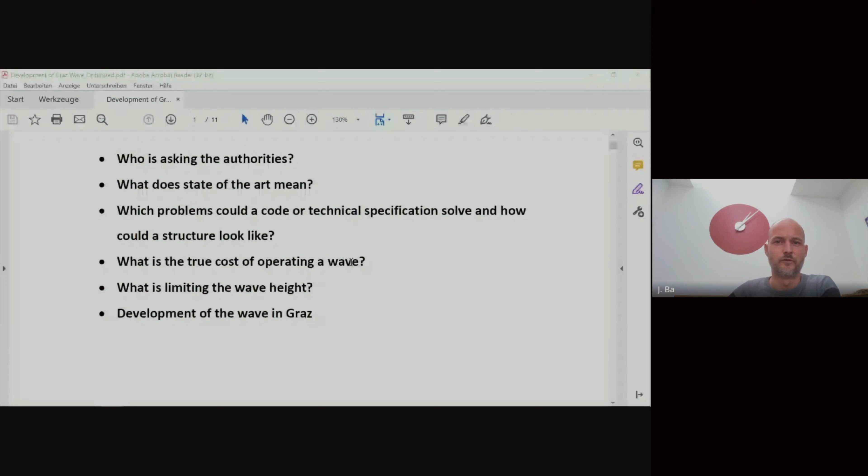This is Josef Bauer. He probably constructed the first wave in Europe, in Čunovo, Bratislava, in 2013. He's the head of the wave projects in Vienna and in Graz, Austria. The talks I had with Josef on the phone were the most inspiring wave-related talks I've had in a while.

So I'd like to share his thoughts on waves and the actual projects. Welcome, Josef. Welcome, we're here. Yeah, so. When preparing what I will talk to you about, I asked myself questions which arose while we were working on our projects.

The project I've been working on in Vienna, and also in St. Pölten there was one project involved, and in Graz as well. These three projects are in different states. Vienna is basically finished, but politics are not convinced, and there's too much trouble with authorities. St. Pölten is also on hold. Graz is pretty far already, this one is about to be finished.

So the first question we are asking ourselves in Austria, and probably some of you have already answered this for yourself, is: who is asking the authority? Is it a person? Is it a club? Whoever it is. What does the state of the art mean in terms of water law?

Which problems could a code or a technical specification solve, and how could the structure look like? This was something I was talking to Paul about on the phone, and I made up my mind, since authorities tend to decide based on written codes or technical specifications. So any wave is, for a typical authority, a new thing. They don't know how to handle it, and they need some kind of guidance for it.

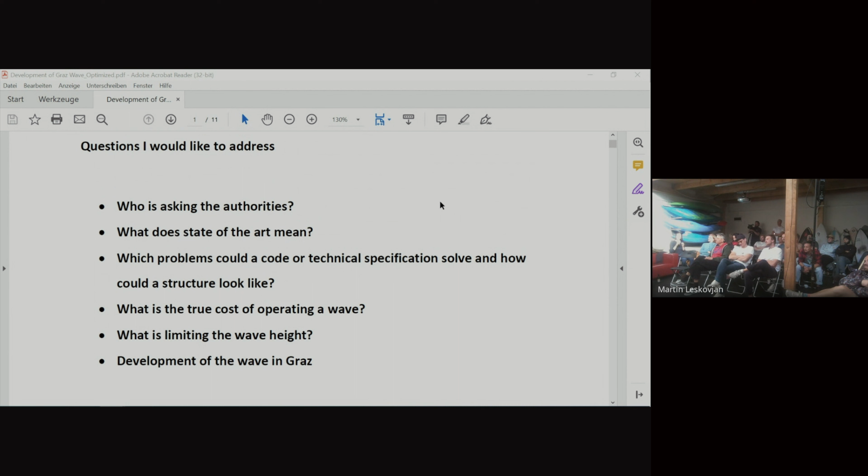What is the true cost of operating a wave is something that is currently a big point in Graz, since we are competing with the water from a hydropower plant. So I'll give you some thoughts on that.

What is limiting the wave height? This is also some hydraulic thing that is keeping me busy. And the development of the wave in Graz in the past year, I want to give you a quick review of what happened.

Where you can see how you can really fuck up a whole year of designing. But at the end, everything you do makes you better. So there is no such thing as failure, in my opinion.

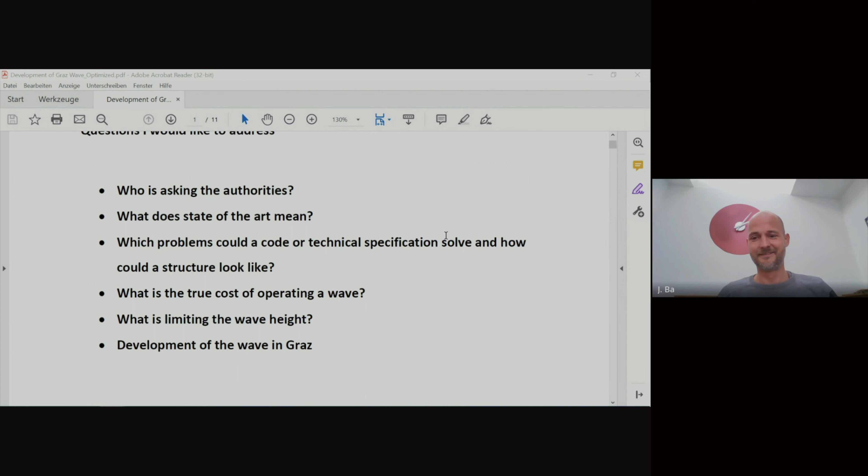I failed a lot. Čunovo was not a real failure, but it was also not a huge success. It's still working. And since then I've failed more than I've actually succeeded, and I think that's part of the game. In surfing as well, I failed constantly, so I'm kind of used to that.

Starting off with the first question: who's asking the authorities? Is it a club? Is it a corporation? Is it a partnership, or is it a cooperative? What could be the differences in liability and credibility in front of the authorities?

If you're a private person asking the authorities, you have the least chance of getting approval—I wouldn't say the least chance, but you're not very credible. If you're a club, I'd say you're also not very credible, since clubs are very vulnerable to changes. If you're a corporation or a partnership, it's what we call a Personengesellschaft in German-speaking countries—companies where the owner is completely liable with all his private possessions.

So compared to a corporation... can you understand me properly? Yeah, all right. I thought I heard a question or something. No, so...

A corporation is like a Kapitalgesellschaft, some form of organization that is only based on money, basically. Once it's bankrupt, the money is gone. Well, people can also be held accountable for it, but normally not.

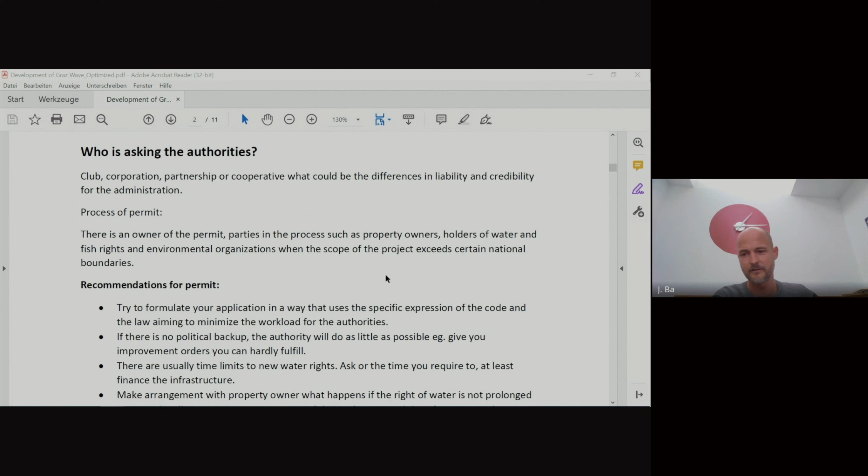So keep that in mind. Think about who is asking for permission. The owner of the permission is holder of the right to build, and this is something valuable. You can get financing for it, because a bank will probably give you a credit or money just based on the permission of building. So this is a very important point you have to take into consideration.

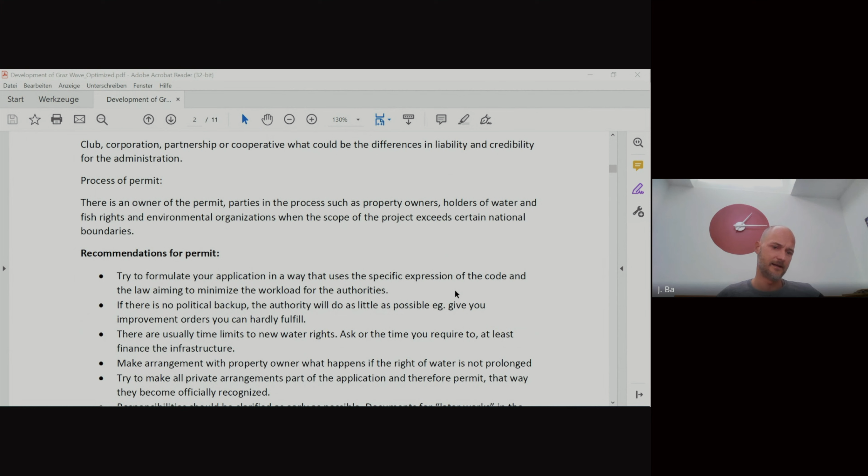And if you're a club, might as well — this is the foundation for a vital club financing, if you have the permit for building.

My recommendation, from my experience as part of authorities, is to try to formulate the application in a way that uses the specific expressions of the code or the law, aiming to minimize the work for the authorities. The authorities are pretty busy, or they are lazy — there are two things. The more you formulate your application so that they can just copy and paste it, the higher your chances that there are no questions asked. It really makes a difference if you address all the relevant points that are in the law, basically the state of the art, which I'll come onto later.

If you do not have political backup, which is quite often the case, the authorities will do as little as possible to help you, and maybe they give you improvement orders. As we did in Vienna, we got an improvement order asking us to present private contracts with all the stakeholders in advance.

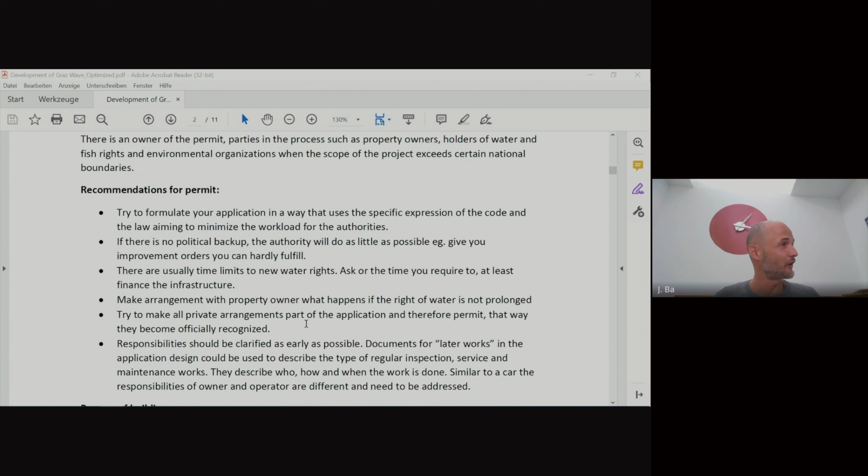So that was actually a fucking asshole move from the authorities. They made us — I wanted to negotiate this in a local hearing, but the authorities said no local hearing, you have to present these private contracts prior to before we do anything. And imagine, as a club, making a private contract with a university, with the city of Vienna — they just give you the finger if you don't have the political backup, if they don't want it.

In our case, we had the wrong political party behind us. The left wing was against it, and the conservatives were for the project. So we had conservatives and right wings for the project, and the left wing state authority against it — not the state, the city authorities. And the city authorities just said, fuck off, we don't do what the state wants. So that was the point.

So try to get political backup, which you do anyways. I think this is a no-brainer.

There is usually a time limit to water rights. Water rights are not infinite — you get a time limit, 20 years for example, as for any construction permit. Try to take this into consideration and ask for as long a water right as you possibly need to finance the infrastructure you're about to build. As far as I know, 20 years is common, but it may differ from country to country, so I can't tell. You can apply for a longer time if you can argue it.

If you can say we invest so much that we need longer to refinance it, the authorities might give you a longer water permission. You can reapply for this water permission, but you have no right for it again. So after 20 years, they can basically say, thanks for being around, we're not talking to you anymore.

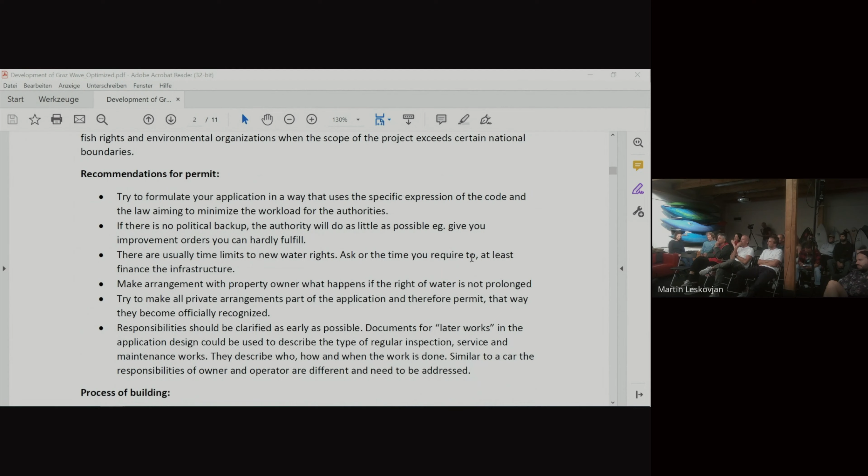But this is a highly legal problem, which I'm not an expert in, but I just want you to consider: make arrangements with the property owner and the owner of rights, like fish rights or water rights, and put this into the application. That way it's part of the permit and it will be valid forever, or as long as the water right is valid.

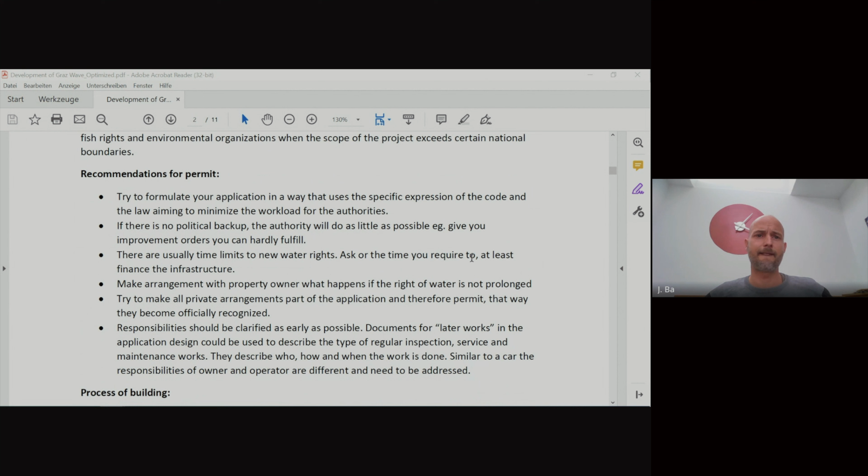That comes in handy because you don't need any lawyers or anything like that. You just make a written agreement, put it into the application, and the authorities will say yes, that's part of the approval now, and it becomes valid.

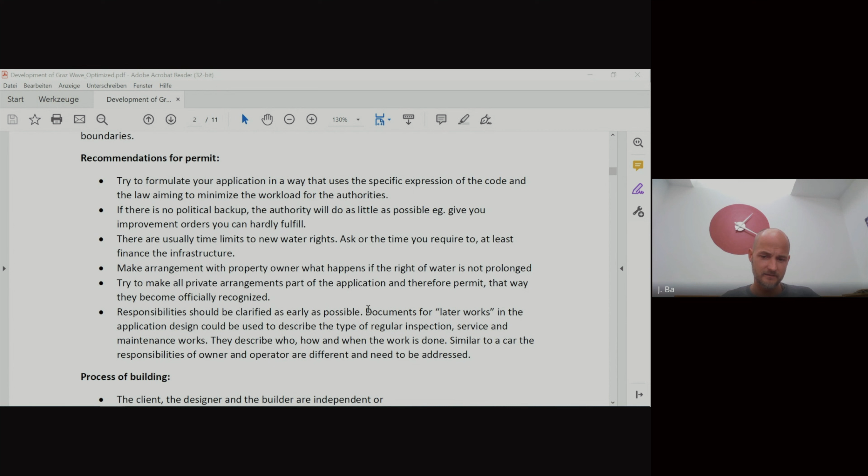Try to make this private arrangement I already talked about, and clarify responsibilities in the permission process as early as possible. We know the documents for later works, that is in Austria for work security. So all the maintenance and inspection works you will have to do, where employees put themselves in more or less danger, these works need to be described and should be part of the application.

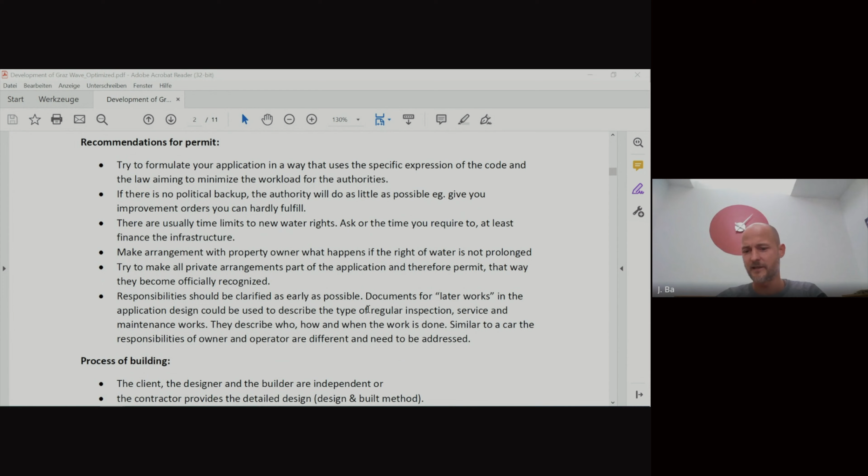I would highly recommend it. They should also clarify who, how, and when this work is done, and who is in charge of it. Similar to the responsibilities of a car owner and a car operator with waves: the owner has responsibilities for any hidden faults.

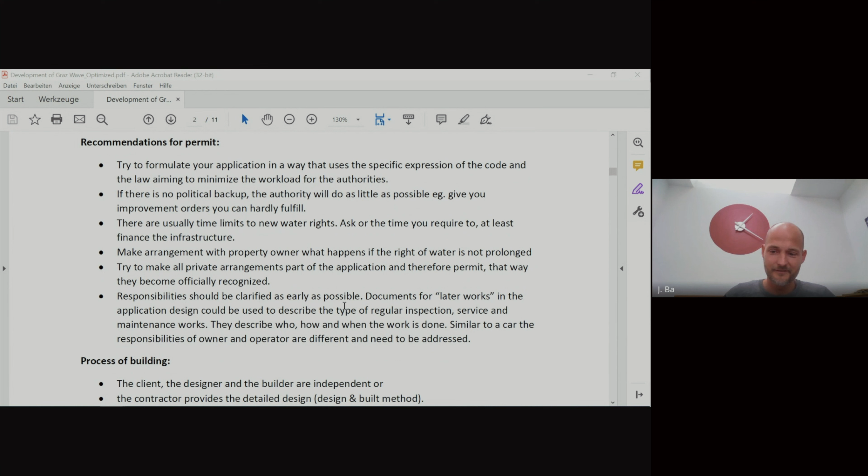And the operator also has responsibility for the obvious, for traffic security as we call it - just check visually if everything is okay, then you're safe to operate. On a car, you need to check if all the lights work; this is just something the operator has to do. I'm sure the guys from Hanover and also from Nuremberg could have talked about it, but this is something very important.

Then the process of building - I think it's pretty clear that there are three parties: the client, the designer, and the builder, the contractor later. They could all be independent. This is the German or Austrian, Central European approach. The Anglo-American and English approach is you only have a contractor who is providing the detailed design as well - he takes on the design-and-build method.

Could be cheaper because construction companies know a lot about how to save money. If you give them all the detailed design prior to building, they are stuck to it. They can always make suggestions, but then they're not taking the risk. Usually there is some kind of value engineering called for in the codes in Austria.

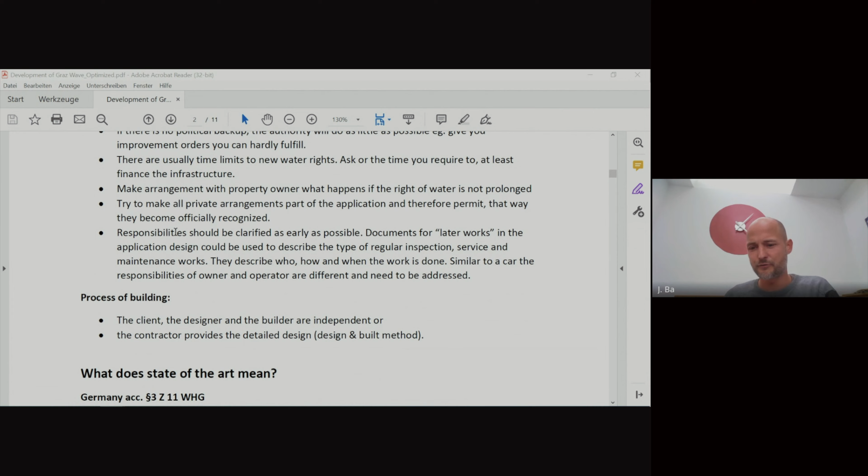I would highly recommend being aware of this. If a contractor finds some savings, the amount you save is split in half between the client and the contractor - basically that's the theory behind it. It's giving the contractor the opportunity to take the risk for efficiency gains in cost-efficient construction ways. He has to take all the risk, but as a reward, he gets half of the benefit.

This is also a way to encourage construction companies to lower prices or be creative during the construction phase. But if everything in the contract is totally described and there is nothing to optimize for them, this is done. If the contract between the contractor and the client says everything in detail down to every screw, there is hardly any room for movement for both of them, as far as my experience goes.

That was the question - these are the things that I came up with in my brief summary. What does state-of-the-art mean in terms of water law?

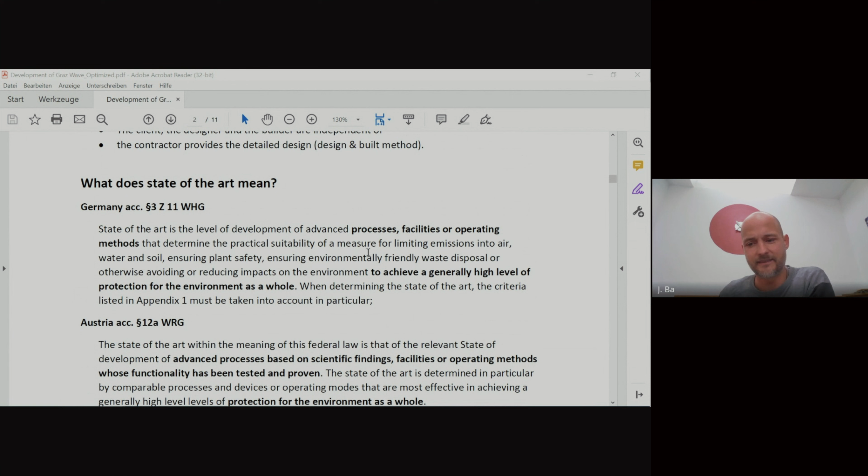We have it in any law, like the railway law in Austria, also in Germany, and I guess in every country. Each law defines the state-of-the-art in the meaning of that law by itself. It's crazy, but that's the truth. They do not differ a lot, but they do differ.

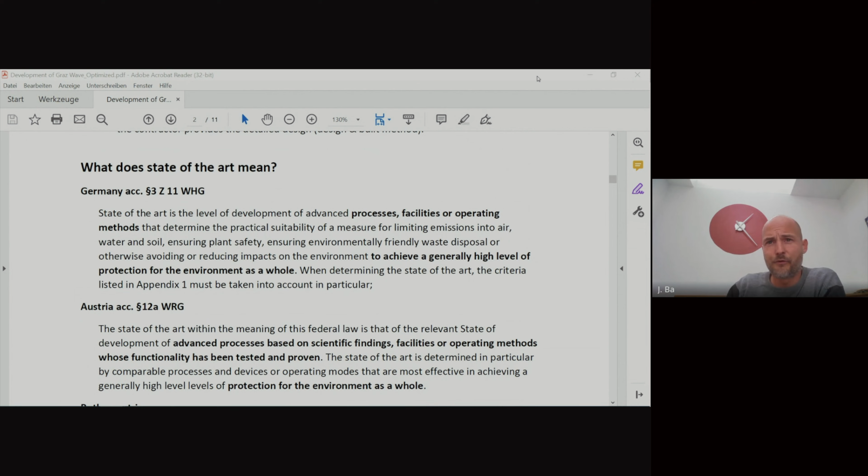For example, I have the two from Austria and Germany. Germany first is the Wasserhaushaltsgesetz, the law that defines the state of the art, the level of development of advanced processes, facilities, or operating methods that determine the practical suitability of a measure for limiting emissions into air, water, soil, ensuring plant safety, ensuring environmentally friendly waste disposal, or otherwise avoiding or reducing impacts on the environment, to achieve a generally high level of protection of the environment as a whole.

You see what the main goal is in the water right is to protect the environment and to limit the emissions. This is something every construction in the river is required to fulfill, this abstract standard or state of the art. As we Austrians try to, we do not invent everything new, so we copy a lot from the Germans, since you are 10 times more than we are, so we do not come up with our own expressions. We have it in a similar way in the water rights law.

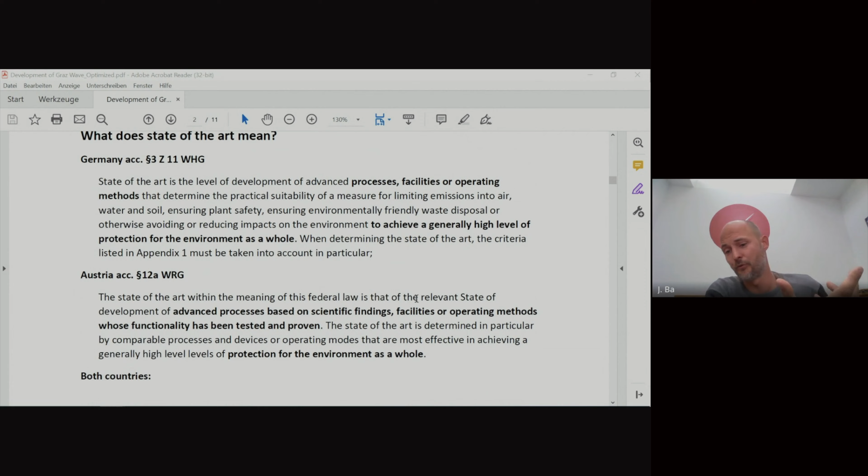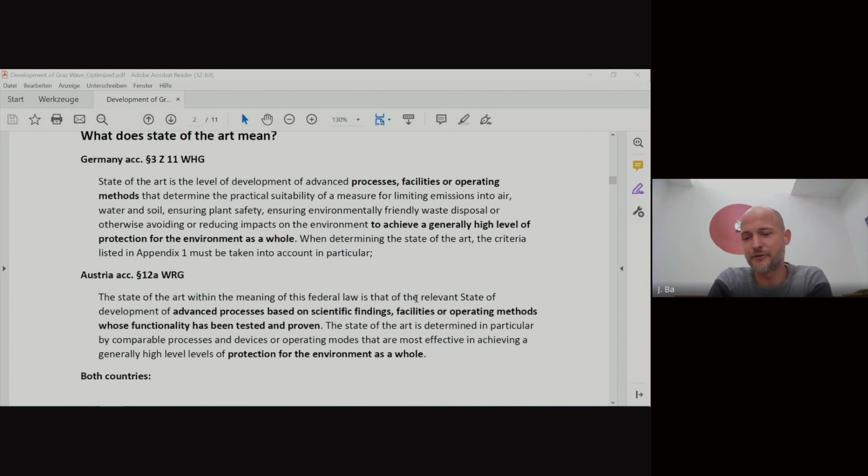Advanced processes based on scientific findings, facilities or operating methods that functionally have been tested and proven. This is something very important for wave building, because all the waves that are existing right now are the state of the art. They are functionally tested and proven, or they are about to prove themselves during operation. And as long as nothing major happens, people don't die there, and there are no legal disputes, as long as that is consensual, these facilities are basically the state of the art in terms of the water law, and we can relate to those.

If you go to the authorities and say, we built something like that there and it works, so I assume it works here as well, they are going to have a hard time to prove you wrong. Or anybody who is against the project will also have a hard time to prove you wrong, in my opinion. So this is a very important point.

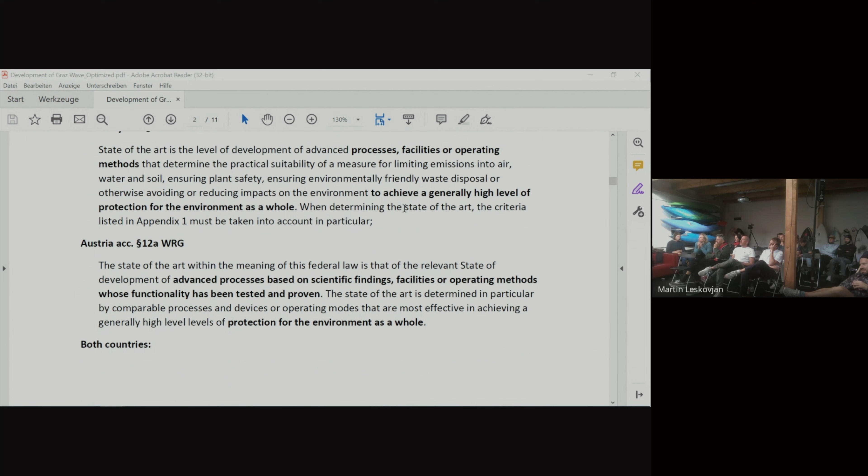This is, in my daily profession, the most discussed point with authorities, because I always say there are no technicians in the lawmaking process. There are only law people there, and they try to come up with this formulation to get a hold of us technicians. This is formulated by law people who try to sum up and confine the technical freedom into some law. And they are always asking me if a design is state of the art, and I'm like, judge for yourself. See this phrase, and then try to tell from this phrase if a construction is state of the art or not. It's very hard to grab.

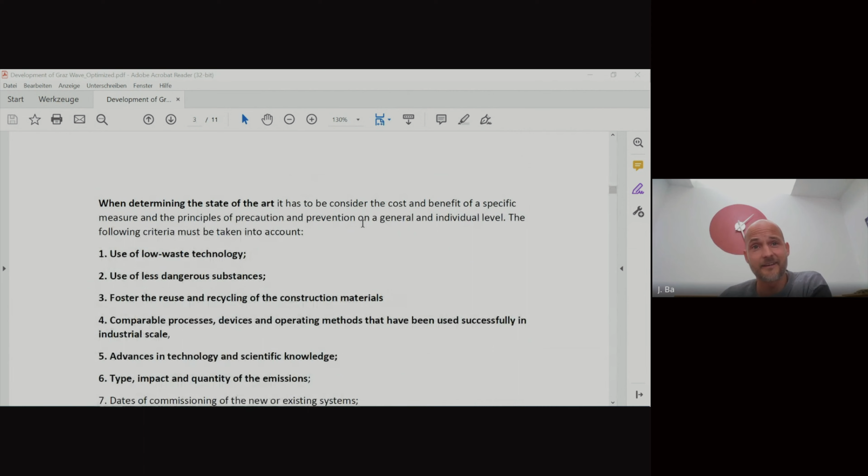Both laws, for both countries, have criteria formulated that are used to describe whether a state of the art is reached or not. That is: use of low waste technology, use of less dangerous substances, foster reuse and recycling of construction materials, comparable processes, devices, operating methods that have been successfully used on industrial scale, advances in technology and scientific knowledge, type, impact and quantity of the emissions.

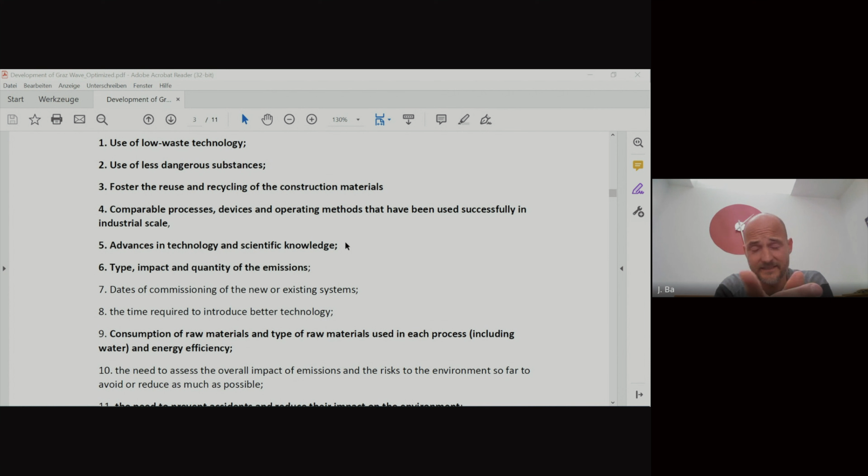The bold ones are the ones I think are also applicable to wave projects: consumption of raw materials and type of raw materials used in each process, including energy efficiency. So this is my translation - maybe it's not exact, well, I used Google Translate, of course, but I corrected it a little bit, so it might not be found exactly that way in the law. The need to prevent accidents and reduce the impact on the environment - it's a very important point.

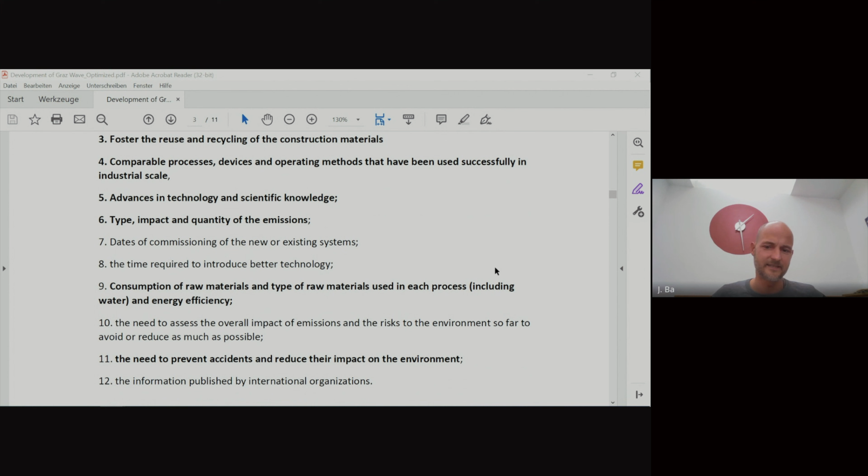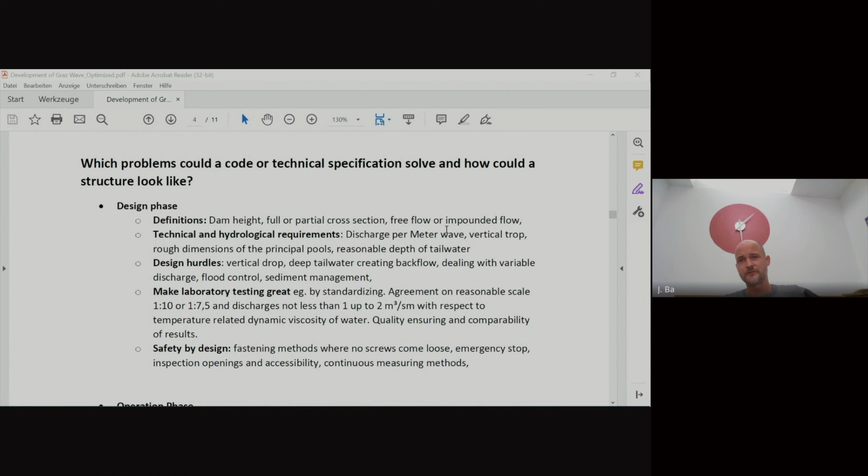That's what I meant: when you apply for a permission, you address all these points in your design. This is the proof that your design is state of the art. And if you at least tell the authorities that you have some ideas on all these relevant points, then they are more likely to not give you any improvement orders on your design. So then you should basically have fewer problems with that.

Which problems could a code or technical specification solve, and how could the structure look like? This is something, as I told you, authorities tend to be a little bit lazy. They look for regulations, codes that are available on that subject matter. We don't have any of those for wave building.

In my mind, I think it would make sense to try to formulate such a code, but it's a lot of work, and I'm not sure if it's worth the work. Plus, you need some kind of society who is in charge for publishing this code. But you can first make a code and then try to find some society who's publishing it.

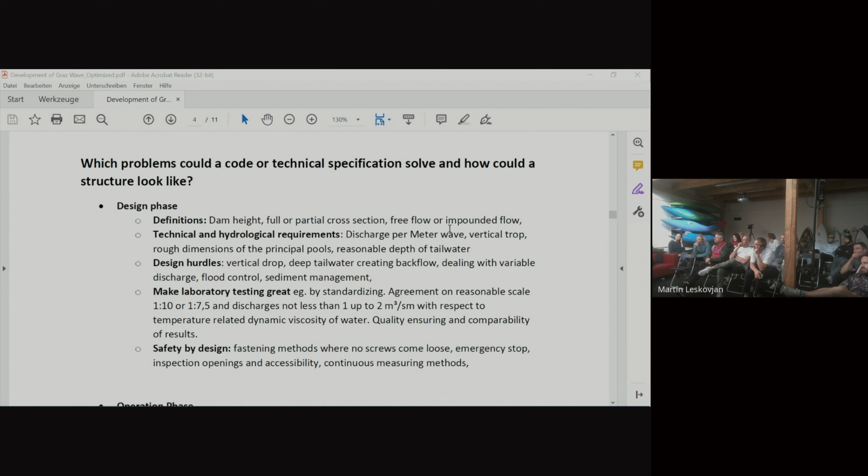And for those societies, there are special requirements - like the Society of Geomechanics. There are several societies in engineering fields who highlight those norms. It's not a law, but it's a rule of the techniques, an acknowledged rule of techniques, and the government could announce it to a law, but they usually don't do it.

So I came up in my mind, I would say two phases are important: the design phase and the operating phase, on which a technical code could come in handy. In the design phase, I would start out with definitions of terms, and then the technical and hydrological requirements, like discharge per meter wave.

This is pretty, I think everybody knows what I'm talking about. Between 1 and 2 cubic meters a second per meter of wave is like standard. 2 is actually kind of a lot. I think Munich has about 2. The Eisbach has 2, I think, but it's too much.

They don't need it. Vertical drop, at least the minimum vertical drop and also the maximum vertical drop. We have also seen problems with too much vertical drop, too fast flowing water that is creating dangerous situations.

Then the rough dimensions of the pools, like the upstream wave and downstream pool or tailwater pool, and reasonable depth of the tailwater. The tailwater, in my opinion, should not be too deep. It's dangerous beyond 1.20 to 1.5 meters - I think it's too deep. It's not necessary, it becomes dangerous. So I would restrain the depth of the tailwater.

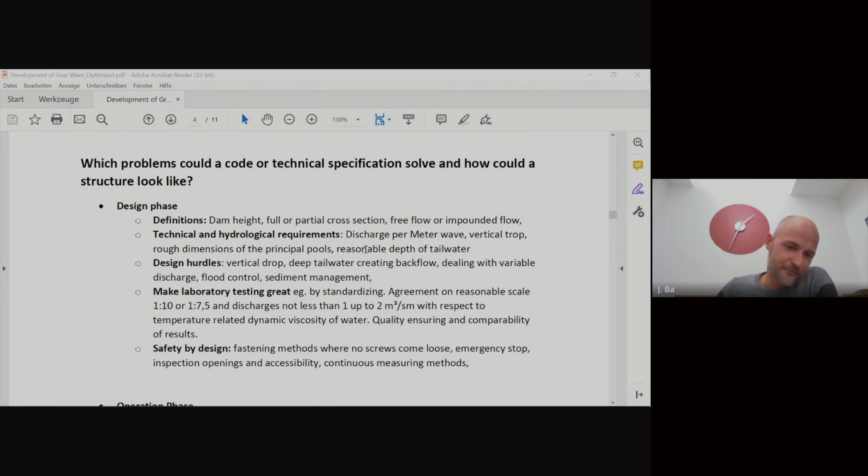And between 1 and 2 cubic meters a second, downscaled of course to the level of the scale of the model. When each and everyone is using the same laboratory boundary conditions, we could easily compare different designs, and there are unlimited amounts of designs that you could probably test in a laboratory. I think it would make sense that we use the same conditions so that we do not repeat the same testing, like in every wave project, everybody does the same testing and sees the same or different results.

I don't know. So this would make sense for me to standardize the laboratory testing and describe some safety design principles - the fastening method, for example, what screws not to use in vibrating structures, or in general, try to avoid screws. This is something that comes loose during vibrations, so try to find different fastening methods, or use screws that are insensitive to vibrations.

And there are vibrations in all of those constructions. They can actually get worse, depending on the construction method you choose. But if you want to be efficient and don't use concrete, you will sure have some vibrations going on.

Emergency stop - there's a lot of thinking going on in this emergency stop in channels, like constantly flowing channels or rivers. You also need some kind of emergency stop just for the authorities. And I came up with some ideas, but I will show you later.

But so far, I don't know if somebody has it - correct me if I'm wrong, from the people from Hanover or from Nuremberg. I don't think you have emergency stops, or you just switch on the weirs and get rid of the water from the wave. I think this way it could work.

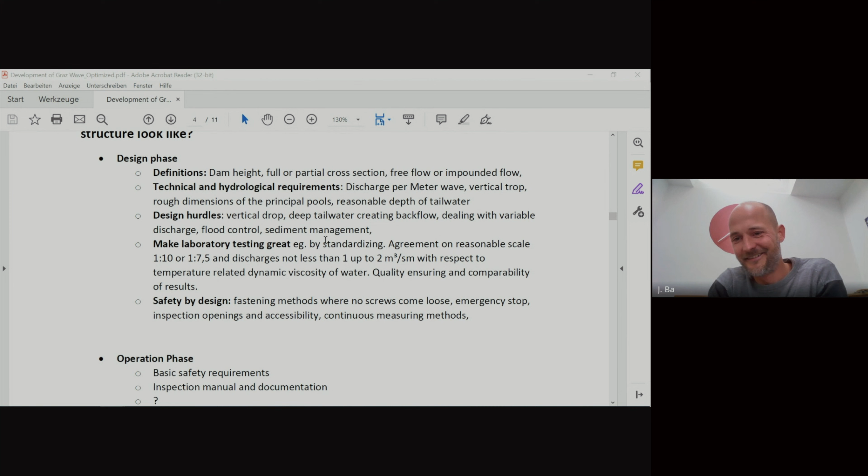I think this is important, and it's obviously done. What happens to the construction if there is no electricity? Is there an emergency procedure for the emergency case? If the power goes down and you don't have any pumps working anymore, is an emergency stop still required or not?

Manual, yeah, there is. There is. Okay, and was that required by the authorities, or was it part of the design from the beginning?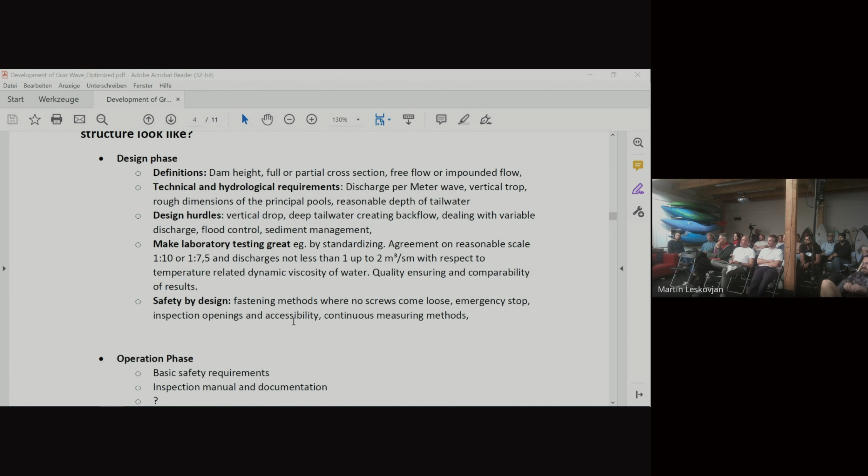Continuous measuring methods is something I think about a lot for the design in Graz, to prevent sediments from getting stuck under the construction. This is a major issue in natural rivers as well as channels, because people throw stuff into channels - bicycles, shopping carts, whatever - for no reason, and you have to think about all those hazards. By measuring the forces that your construction is subjected to, you could detect those bodies under the water just by unevenly distributed forces. This is what we came up with, so we could shut down and make an emergency shutdown if we detect unevenly distributed forces. This is the way we go.

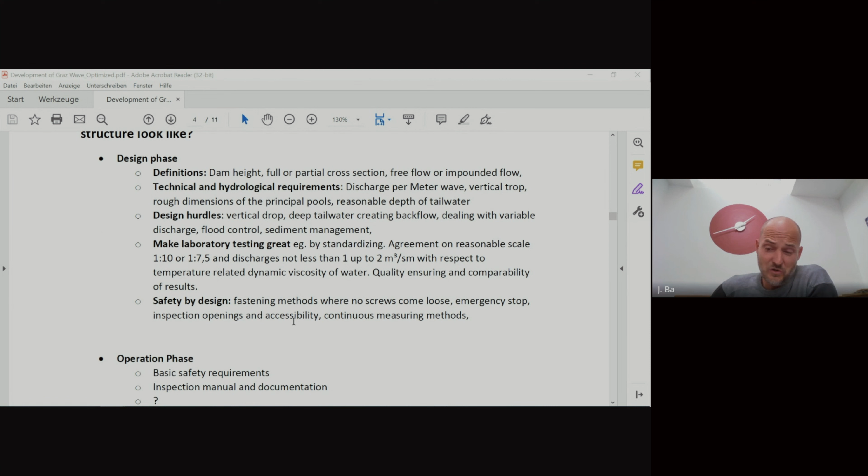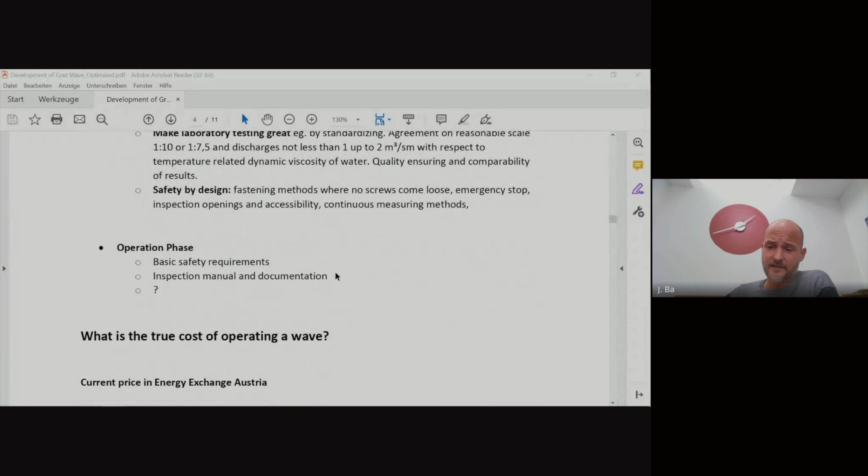This would be interesting for me - how the Dreamwave device is working with the sediments that could be there or not. So maybe we can highlight this in the discussion later.

Operation phase is about the basic safety requirements. We could name this, and the inspection manual and documentation that is at least required would also be interesting to have written down in a code, and all the projects could relate to that, and authorities as well.

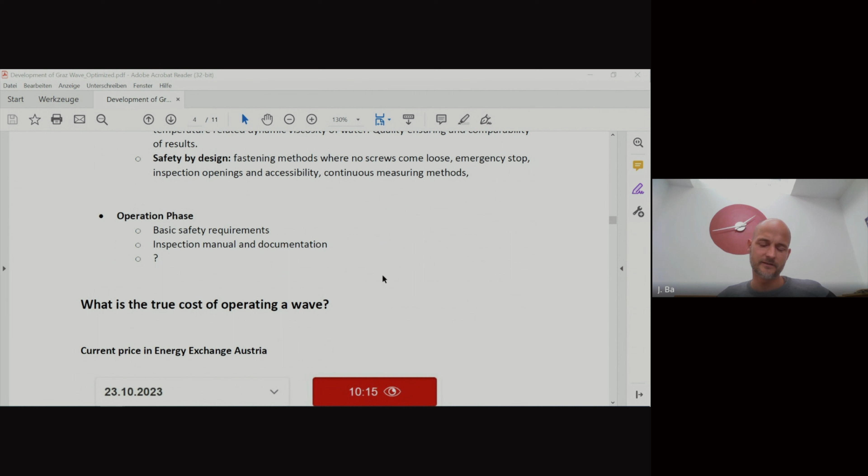So head over to the next topic. What is the true cost of operating a wave? This is something we have to deal with a lot since we're in the tailwater of a power plant in Graz. The big thing in all cities, as far as I discovered so far, is that you have ancient creeks running through the cities where mills and blacksmiths used to be. These are usually creeks that are not too big, mostly less than 10 cubic meters a second, which I think is a reasonable discharge for building a wave, at least.

There are projects with less than that, like in Salzburg, but I don't think it's really worth it to build a wave with 5 cubic meters a second if you do not pump as well, like a hybrid wave. This is something I came up with. What makes the most sense for me is, since there are so many channels in cities, in very downtown locations, usually with small scale power plants, and usually with a little bit too little water - not 10 cubic meters a second, and not even more.

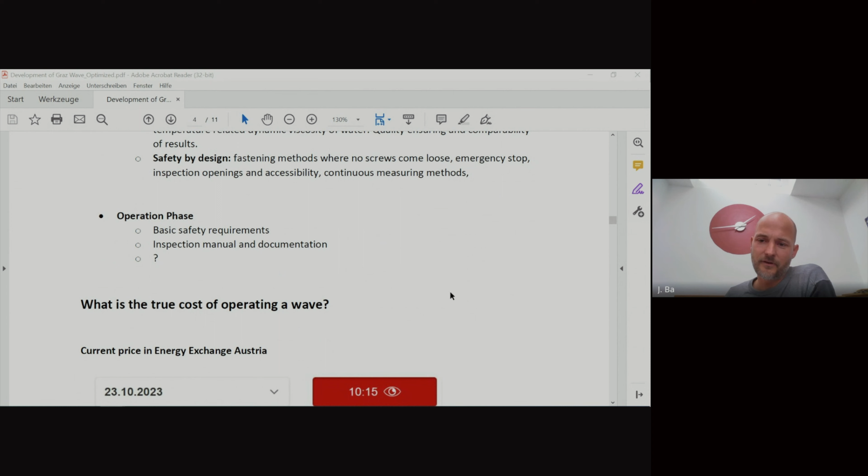So the cost of operating a wave is basically determined by the energy loss of the hydropower plant that you're taking the energy away from. And this is what we are doing - we're impounding the water level of a hydropower plant. That's a pretty easy calculation once you understand it.

Is like, you know what 10 kilowatts is? Anybody know in terms of water how much that is? I don't want to examine anybody. Yeah, it's just 1 cubic meter falling down 1 meter.

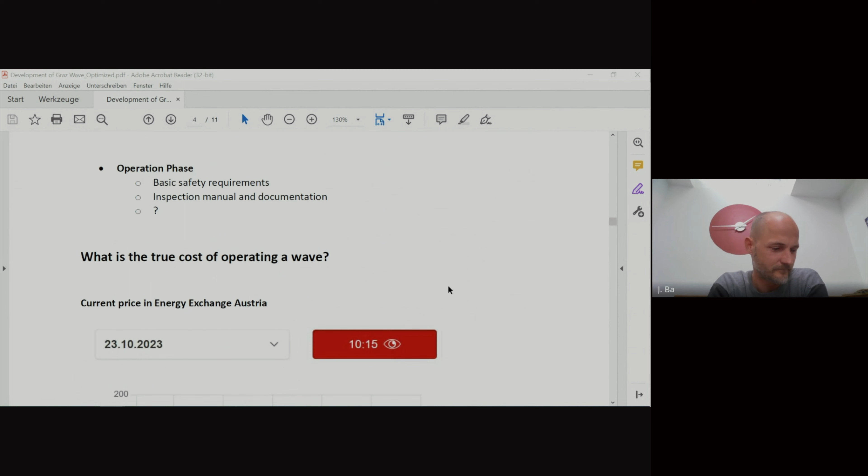So 1 cubic meter of water dropping from 1 meter equals 10 kilowatts basically. And that's the same energy density that 1 liter of diesel has. So you can compare those numbers. And the megawatt is what's traded on the exchange stock market.

Right now we have prices of 122, 123 to 135 on the stock market. That's today per megawatt hour, and 1 megawatt over an hour is a lot. This is like 1 cubic meter falling from 100 meters, or 10 cubic meters falling from 10 meters, basically neglecting all the losses, like friction and other important parts for producing energy. But at the end, 10 cubic meters falling down from 1 meter is a wave.

And in that case, you can produce a wave of considerable quality, and you can see that the operational cost is 0.1 megawatt. This is just the electricity you take away from the hydropower plant, not the consumer price - this is the producer price. The price that the farmer, in that case an electric farmer, farming water or farming whatever you do, gets - it's the cost of the producer, not the cost of the client.

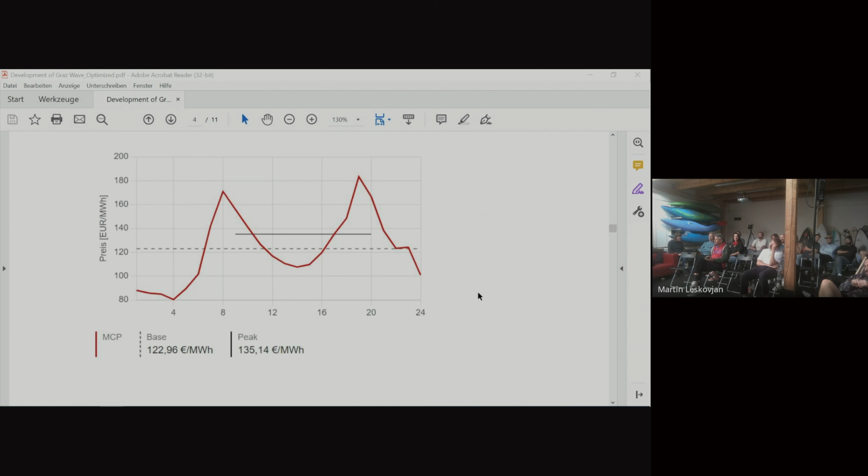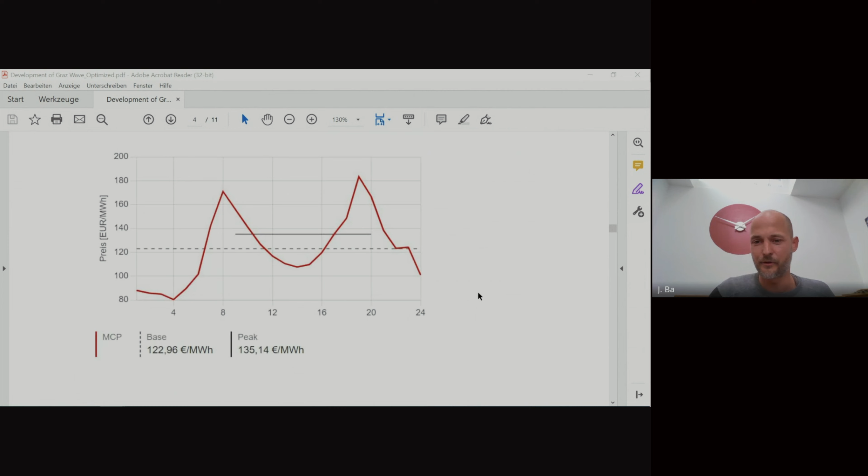You can tell here, if you have like 1 megawatt, it's approximately the same amount as one person, a qualified person, working an hour. So if you have 120 euros, it's the same you pay for a mechanic to fix your car. So a megawatt is basically the cost of one hour of labor, of course, in a high-priced country like Austria or Germany.

Josef, if I can jump in this moment, from my experience this efficiency difference depends a lot on the type of the power plant, because some power plants are capable to increase and decrease the efficiency, more modern ones. But older power plants usually have problems with changing the production, which is also a problem we face here. It's not like we just take off these 11 to 13 cubic meters and that's just the difference. It has much wider consequences when they need to adjust the power plant.

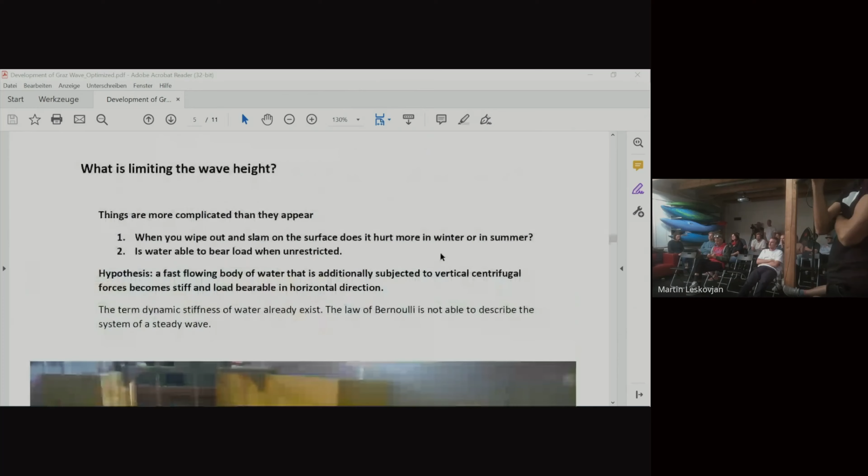So this is just from our experience. We are running a little bit out of time, so I would like to ask you if you can just sum up or close, sum up this speech. Yeah, I can go through it a little bit quicker, no problem, it's not a big thing.

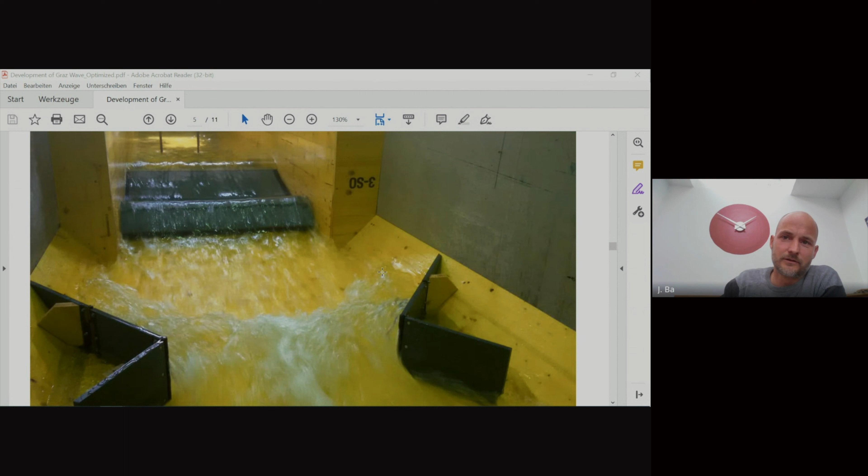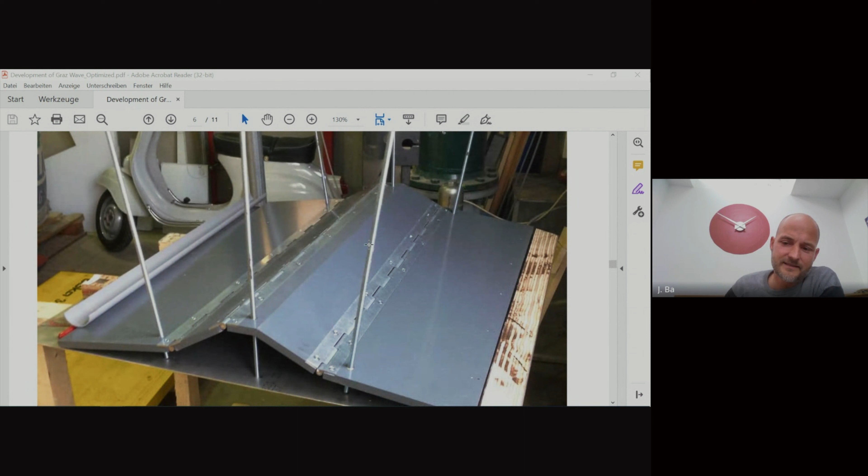Just what we did in the past years, what I did, is we were testing Čunovo in the model, tried to optimize it. This was model testing we did. It behaved exactly the same. We came up with quite interesting results here, this is the riverbed flap I designed back in the days, which we were testing here, to see how it could affect the wave quality in Čunovo. Here you can see the results.

Basically, you have this dashed line that is the water level of Čunovo as it is right now, and probably will be forever, I don't know. And we changed it and made the wave height double, and almost double as long and double as high as it is right now, so 1.2 meters. That would be the maximum that is possible with the existing structure.

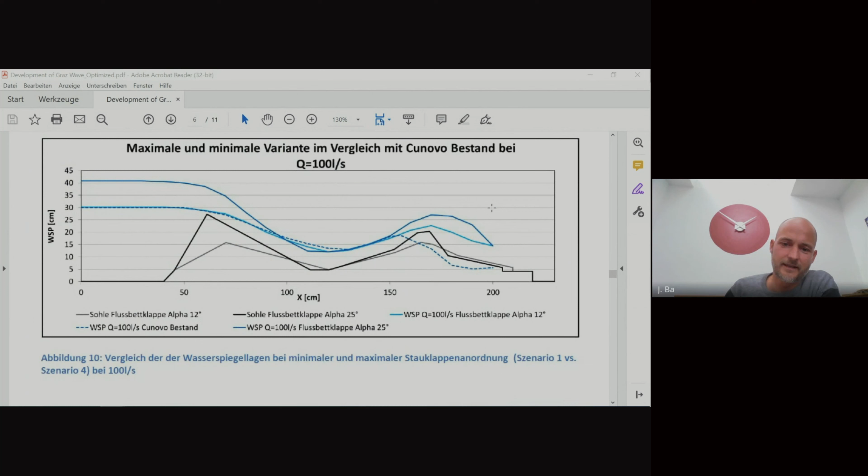This, to me, it hurts a little bit in my soul that the construction has been in the same state for 12 years. But you know, everybody's happy there. The system works, it's good for beginners. It could be way different, it could be much better or bigger, which I like, honestly, because I've been surfing for a long time, so I like more radical waves. But yeah, the client is boss, and they're happy.

This is the hydraulics behind it. I'll leave it, but it's very interesting. Bernoulli's principle is not valid anymore, what I found in this case, because it's way more complicated. We have centrifugal forces, which are indicated by this circle here and this circle over here, that are working against or in advance of the hydraulic system. And to be honest, I didn't quite understand it yet.

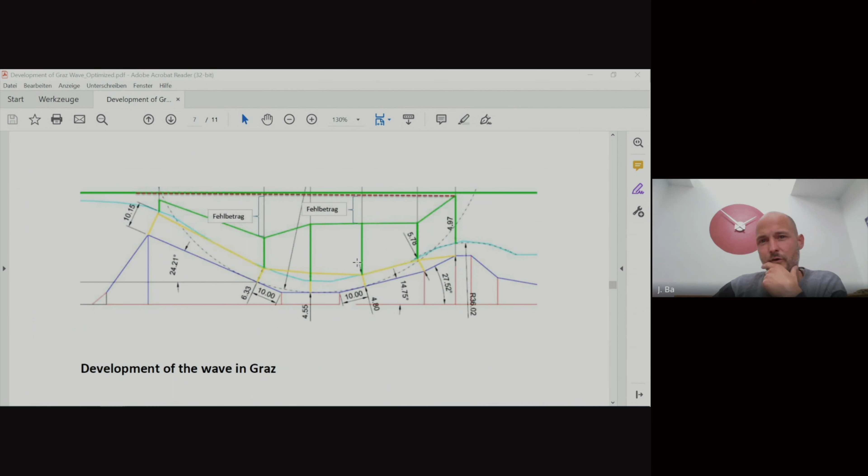We have these legs here in the energy line that are related to horizontal forces in this structure. There is a stiffness of fast-flowing water, and water that is subjected to centrifugal forces acts differently than water that is free in its flow. It is not a free flow, it's confined by upper and tail water, and it's very complicated.

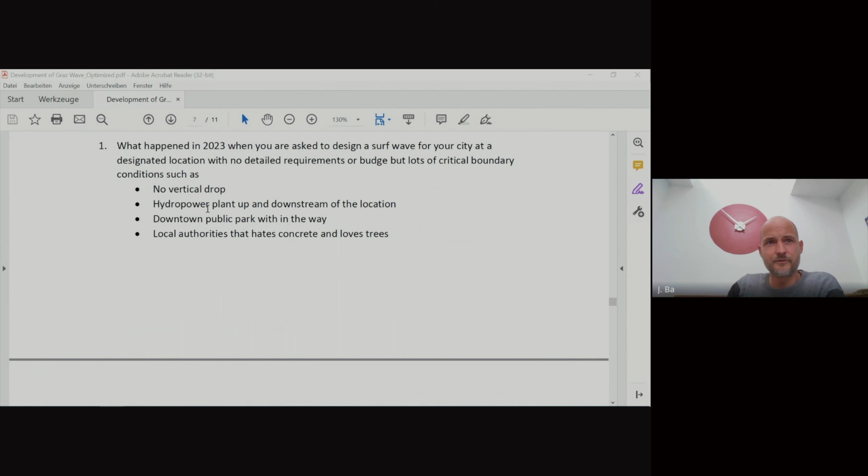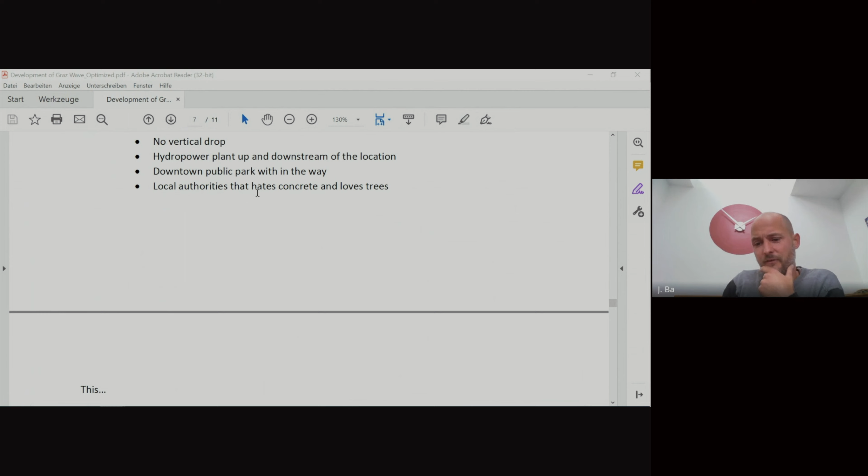The development in Graz, short and brief: we have no vertical drop as we have in Čunovo. It's a similar project, we have the hydropower plant problems, but that is different. And we have a downtown public park with a lot of use and problems, I'd say, and a local authority that hates concrete and loves trees. We have a lot of trees there, so we're not supposed to kill any trees. So they were not giving us any requirements.

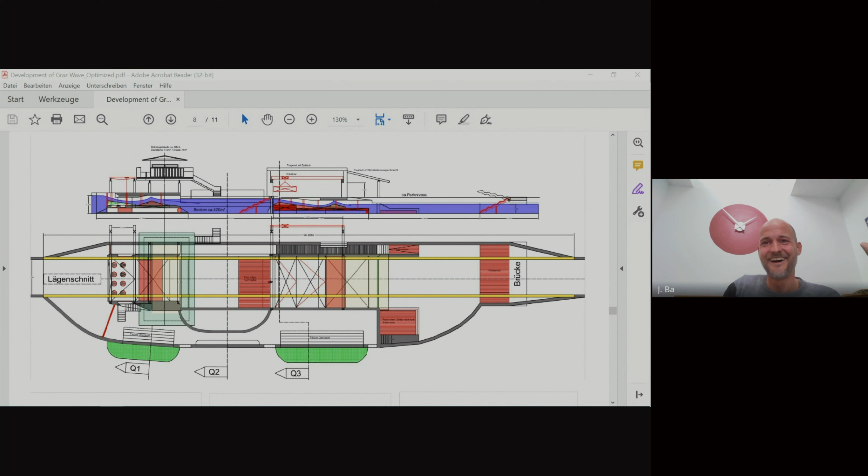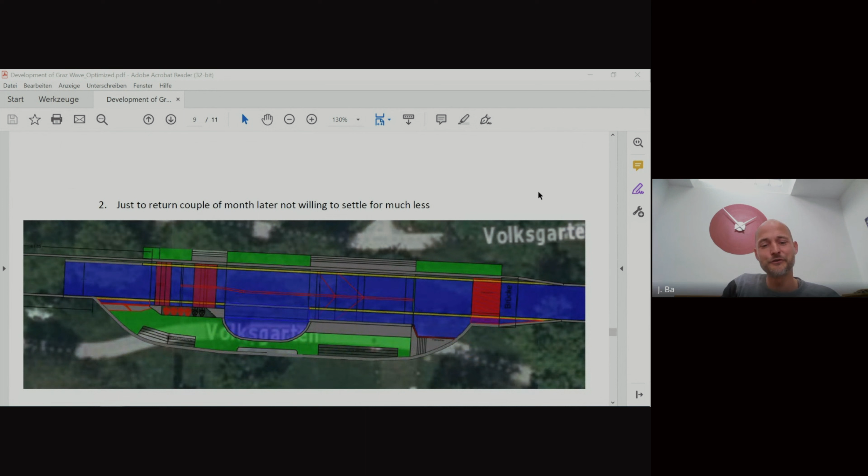So I came up with this. That's what happened when you give an engineer a free hand and he's going totally crazy. The authorities were kind of overwhelmed by the design. They said that's a bit too much, we will not afford it. So they sent us home again. I was kind of pissed, but you can see the surf house flowing over the wave, everything I'd love to have.

I reduced the design to, in my opinion, the bare minimum, but the authorities still sent us home and said no, this is still too much, too expensive. It would have been two waves in a row.

With hybrid technologies we were pumping from underwater. We suck the water back, pump it through here under the wave, and then we have two waves operating on a natural flow of 10 cubic meters a second, plus an additional internal pump circuit providing another 10 cubic meters on demand. So you have up to 20 cubic meters a second only in this area - 10 cubic meters entering and 10 cubic meters leaving the cross section. Within this construction, the city wave is pumping only, and additional 10 cubic meters of natural flow are provided to gain more water on the waves and more performance.

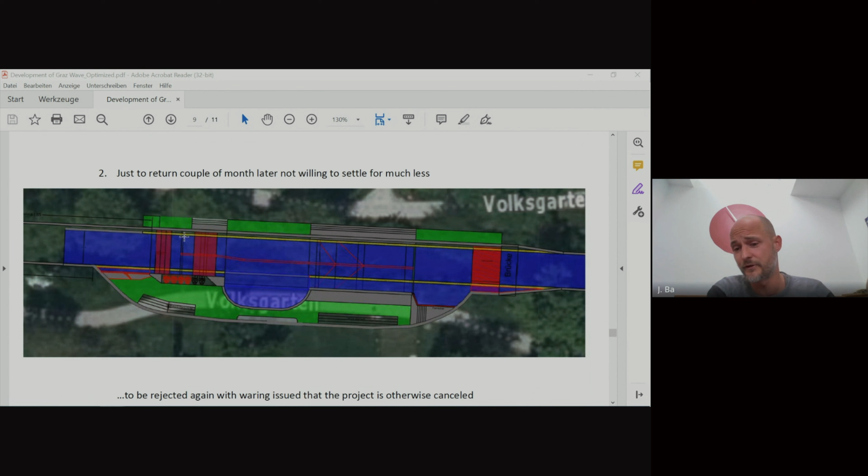I am totally convinced that this construction - we tested it in the laboratory in Vienna - for small scale rivers with 5 cubic meters, it makes total sense. If you start the pump slowly, you can increase the discharge to whatever you want.

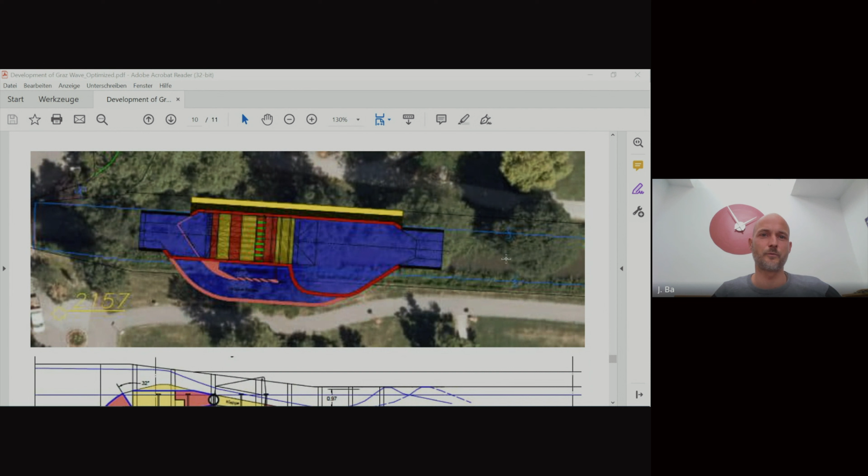We were sent home again, and came up with this design - a bypass, since there are power plants upstream and downstream. In case of emergency shutdown, we need to bypass the water to keep the power plant chain running, because they have like 300 to 400 euros an hour of electricity production, and any stop in the water is costing 300 euros an hour. So you're not supposed to stop the water, plus the pump that is pumping against it. Yeah, we were sent home.

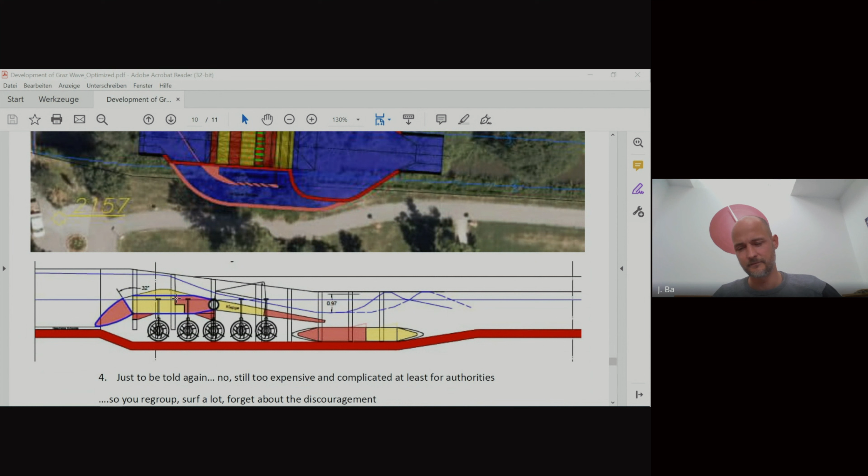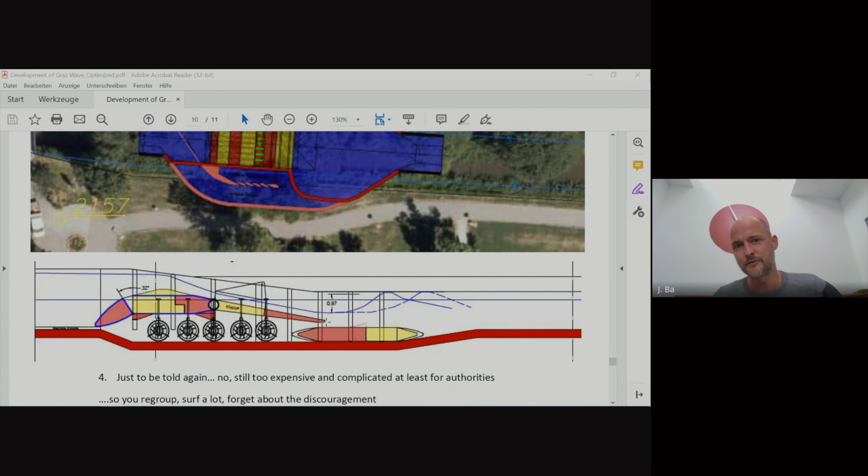This was the design - it looks like a fish. I want to introduce it because it's not a secret. It's a body that is floating, basically a volume that you can fill with water or air, and then it rises or sinks to the bottom. It has a nose, the fish head, which shuts down or stops the flow and forces the water to go over the construction. Then you have the pumps that are pushing the water, and they mix together at the end of the tail of this construction.

It was a bit too much for the authorities - they said that's beyond the scope. But that's why I showed it to you, maybe there's another project. So that's where we are right now - we reduced the design to what's necessary. We're about €500,000 for this, which is pretty a good price. I think we can do it with that amount of money, and since construction prices are dropping, or at least companies are not asking as much as they used to.

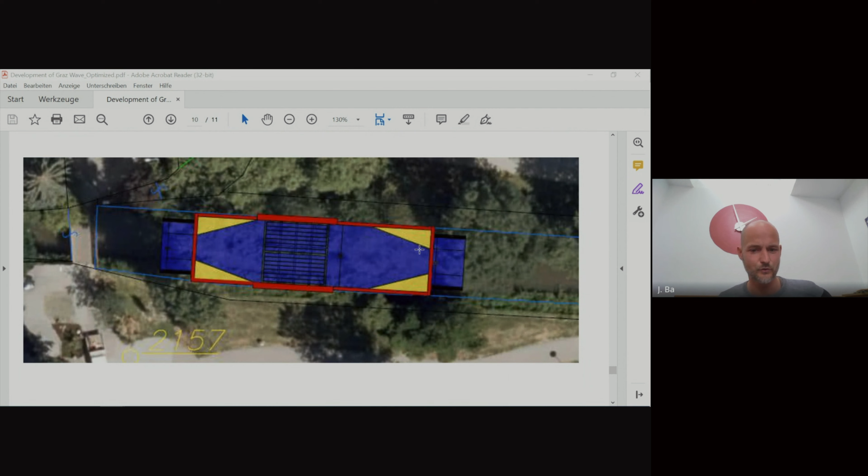This is where we are right now, and this design is internally approved. The approving process, since the state or the city of Graz is behind the project, will not be a problem. I think this was a long way - one year to come back to this pretty easy looking design, starting from the maximum. The good thing is, if you start with the maximum and decrease the design, you can always go back to it over time. We start with a small project and show the authorities what's the end point of the construction. So we try to build this, and in 10 years after that we can go to the next stage, and so on, until we are at the beginning - what I showed you.

This is my approach to that problem.

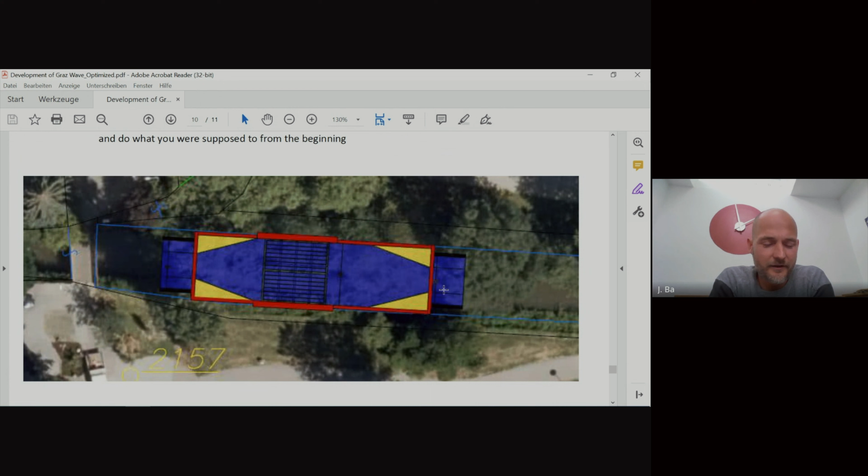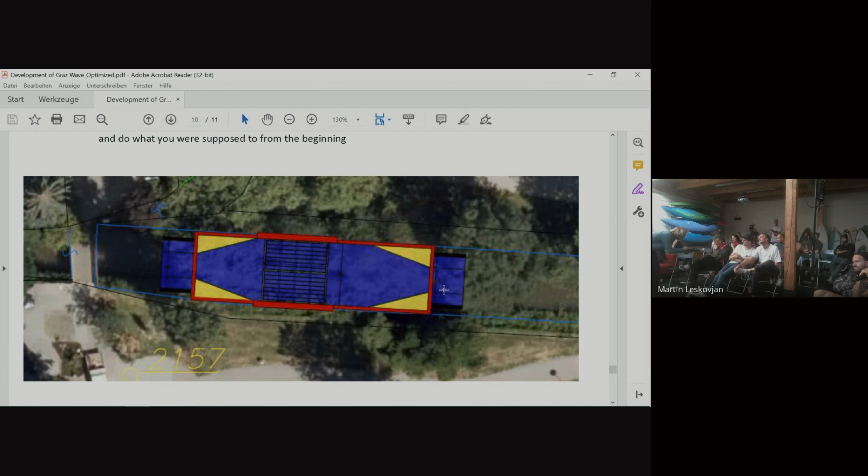If you can just finish the presentation with some last message you'd like to share - thanks for all those motivated initiatives that push wave building further. With every wave project, it becomes more easy - new projects become more easy. That's the big point I want to make.